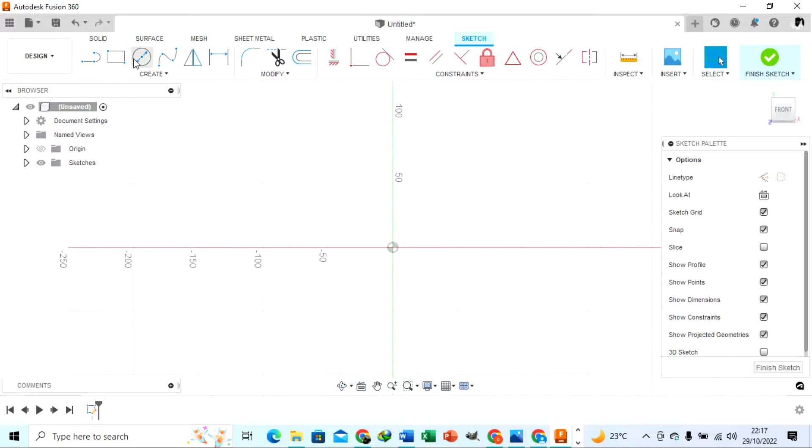On Fusion, just select any plane, then go to circle command, draw a circle. The diameter there is 260. Once you do that, now you can go to line command and draw the two construction lines, so that you can select these two lines and press X on your keyboard to convert them to construction lines.

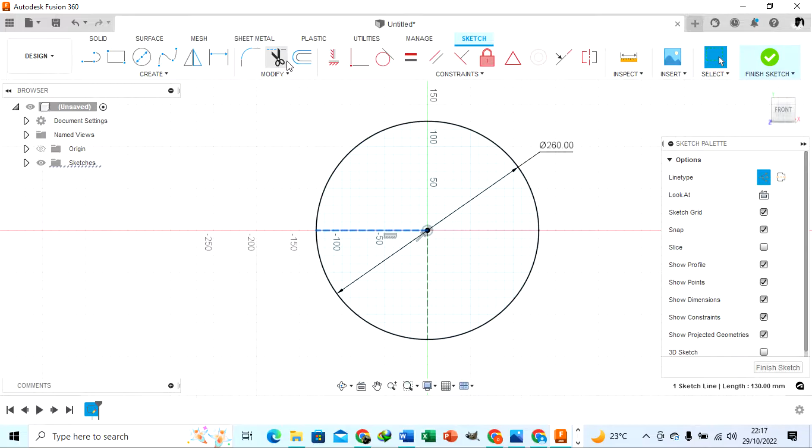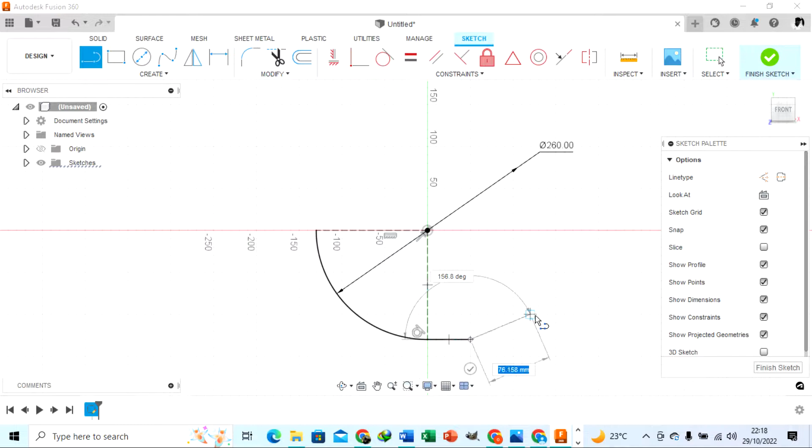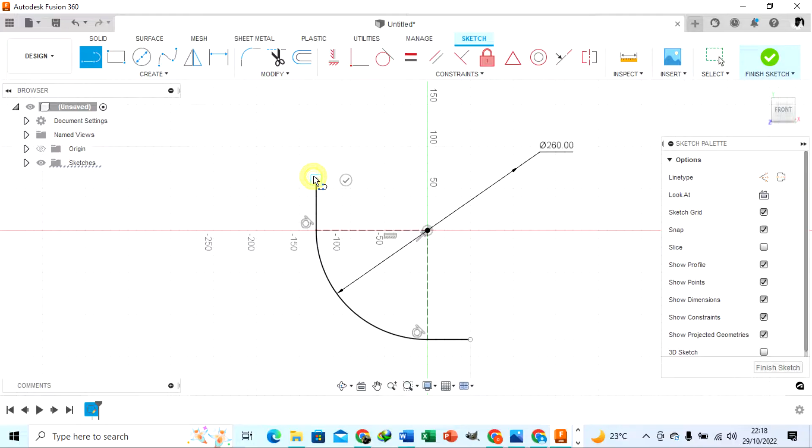Sorry, I trimmed the wrong one. Just Control Z. Once you trim the unwanted parts of that figure there, you can go ahead and now add the lines. From the figure, there were some straight lines measuring 150 millimeters. By default, it is tangential to the curve there.

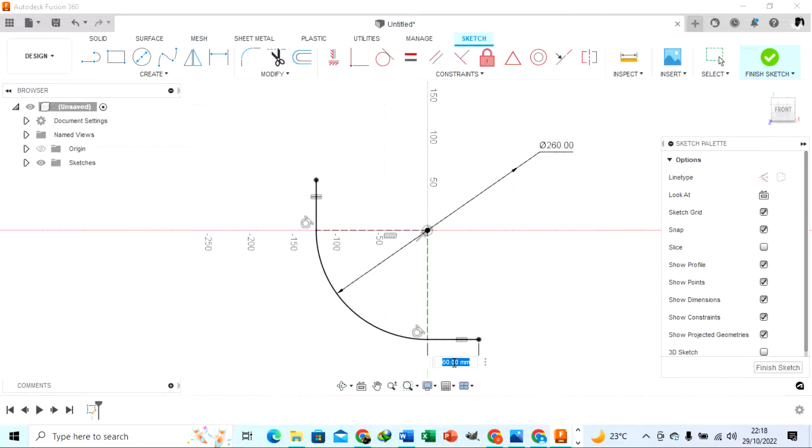So select both lines and ensure that they are equal. Select them by holding the Control key on your keyboard and add a constraint of equal there. Add the measurement as 150. So this one looks good. And now from there, the outer diameter is 290 while the inner diameter is 210. So the difference between the two there is 80, and meaning thickness will be 40.

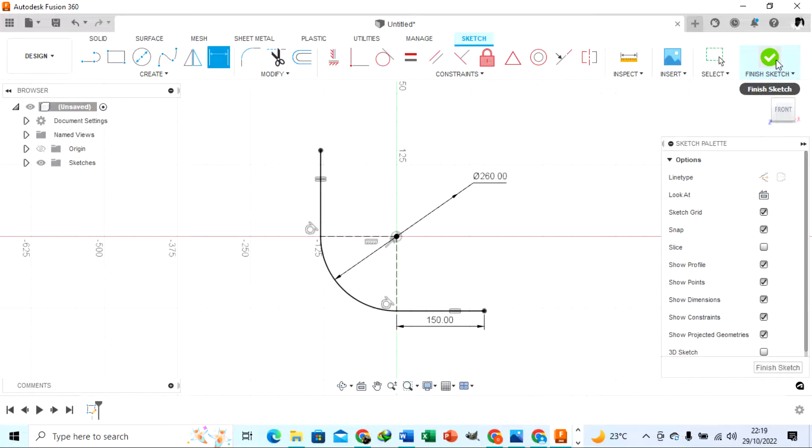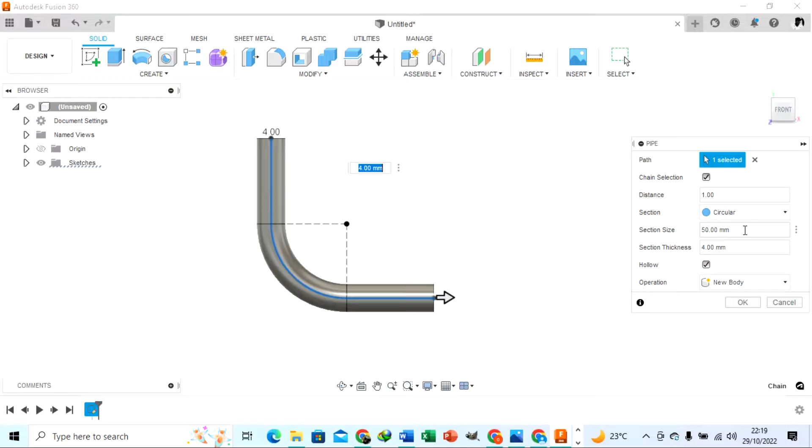Go to pipe command under create. So pipe command, ensure the hollow is checked on that floating window. Ensure you check the hollow box there. So the outer diameter is 290 millimeters. Then this one doesn't look right. What's not happening? Let me just confirm something here.

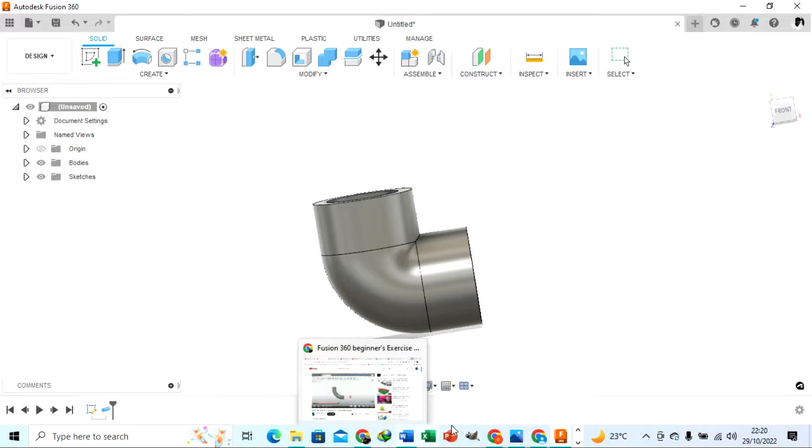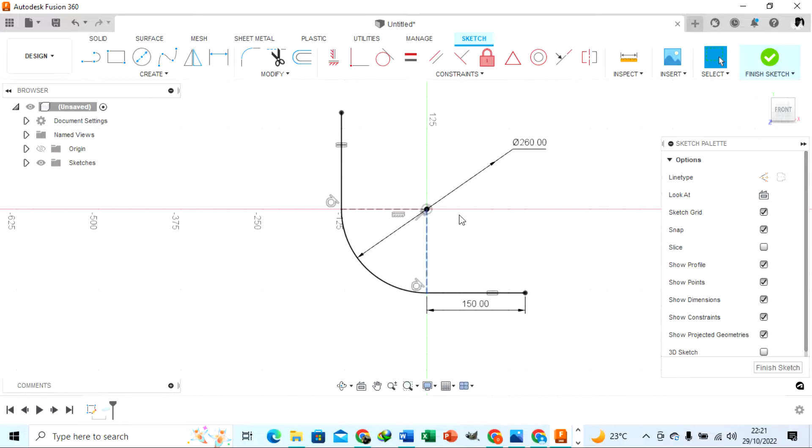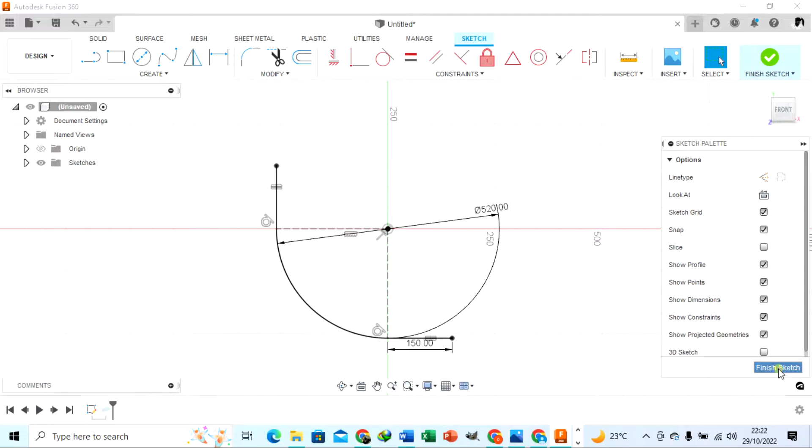Oh, sorry. It seems I used a diameter of 260 instead of a radius of 260. So go to design tree under sketch, and you can change that. So instead of using a radius of 260, I used a diameter of 260. You can just change this by doing 260 times 2 on that box there. 260 times 2. And now this one looks okay. Yeah, so this is the goodness of Fusion. You can always go back to the design tree and make the changes.

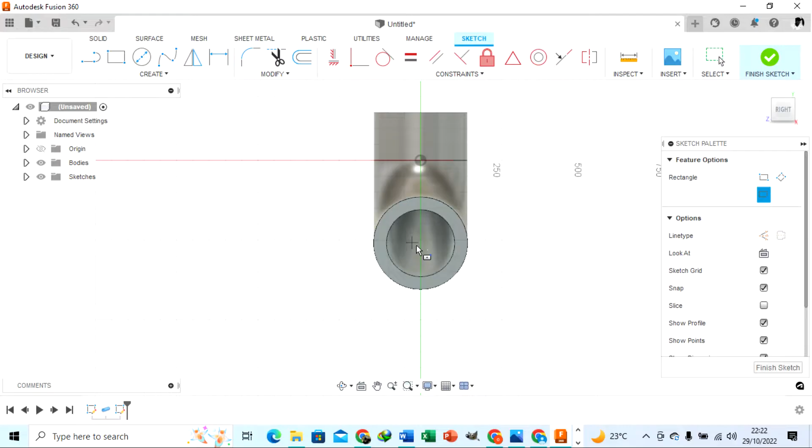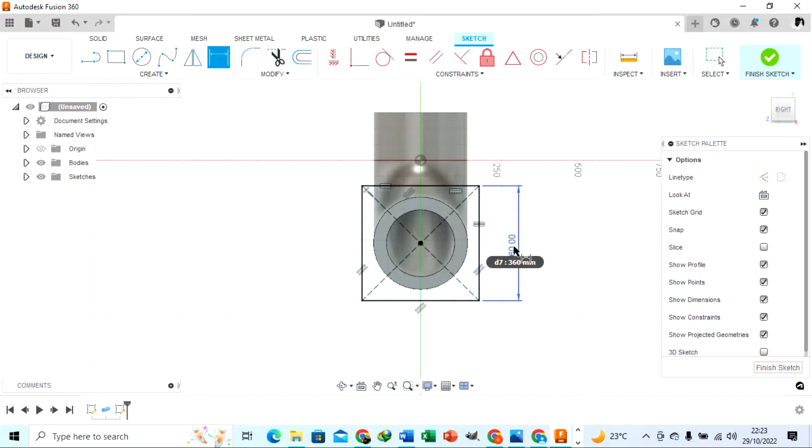So there's this plate measuring 360 by 360. So just select that front face there and go to sketch, and we take a center rectangle. Since it is a square, we can go ahead and ensure that both sides are equal. Add equal constraint there, and now we can add the measurement on only one side. Then we can finish sketch.

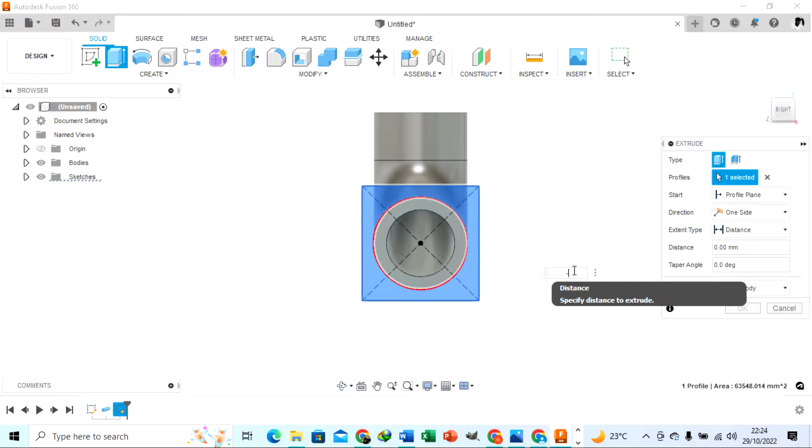Then you extrude. You can always use the shortcut key on the keyboard. For extrusion, you just click E. Now since it is going to the other side, we can feed in negative 50, so that we extrude towards the opposite direction. Okay. Now we can add the holes.

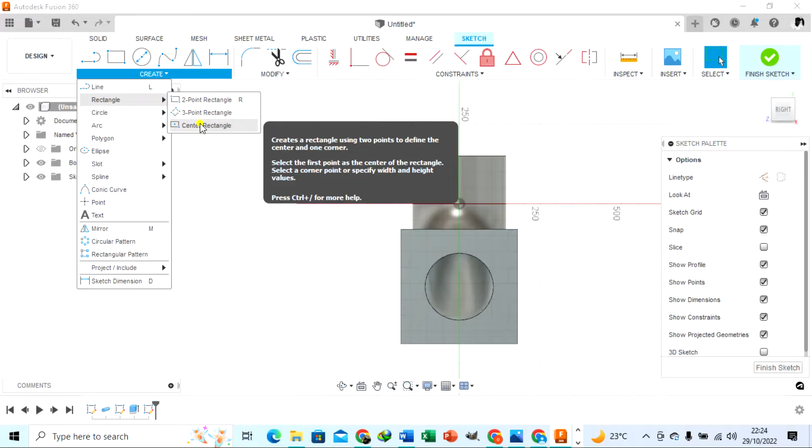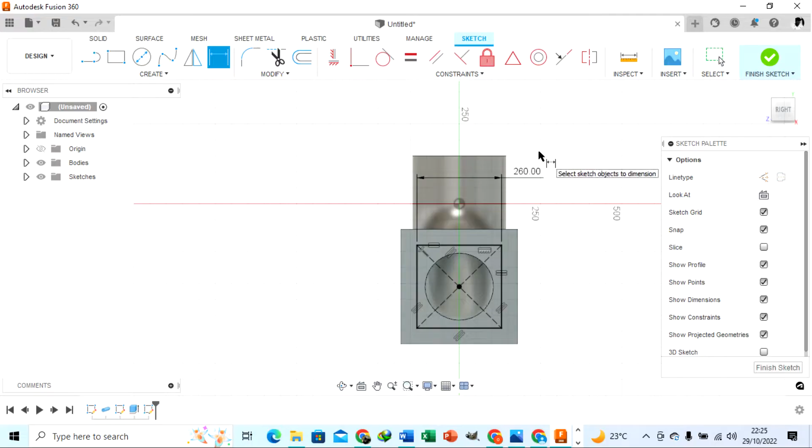So for the holes also we can add a center rectangle, and we ensure the sides are square. So you add the center rectangle, and this rectangle is not part of the sketch. It is just for construction purposes. It is measuring 260 by 260. Then now you can go ahead and select. You can always power select, but let me just select the lines there manually, to make them construction lines by pressing X on your keyboard.

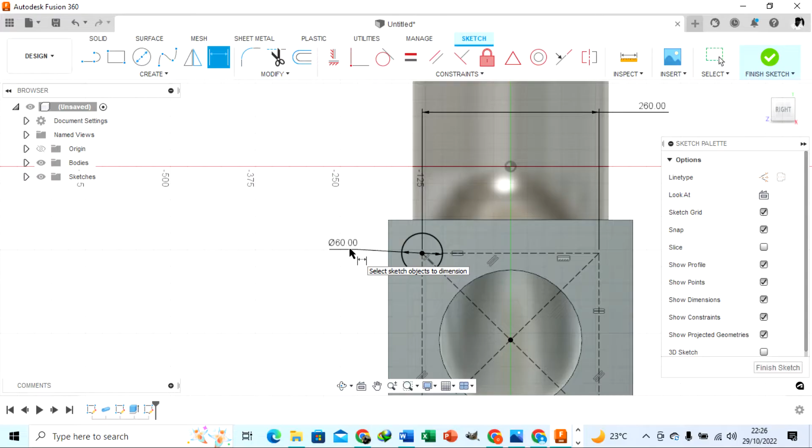Now we can go ahead and add the circle on one of the corners of this rectangle. The outer circle was measuring 60 millimeters, while the inner circle was measuring 30 millimeters. You can always also offset the bigger circle. The difference is 30.

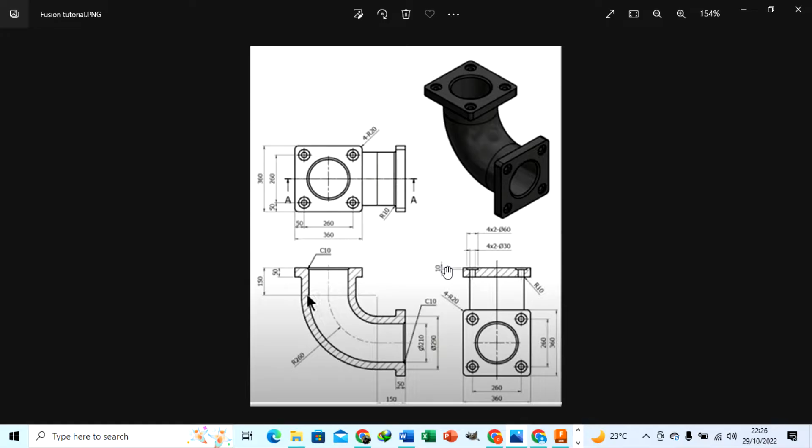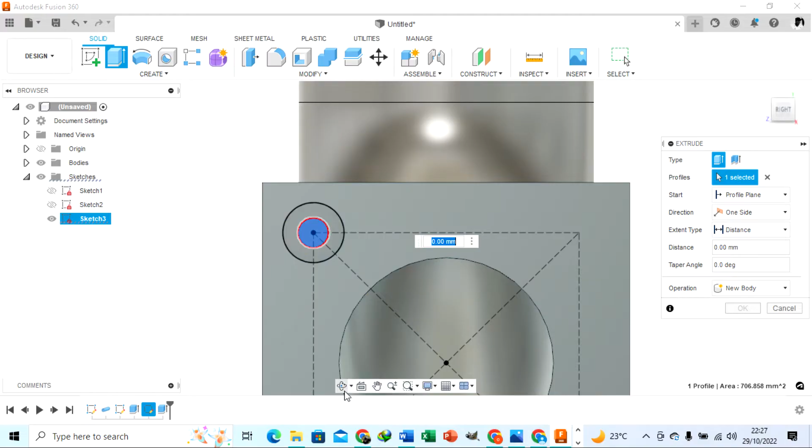Once you do that, you can now extrude cut. The bigger circle is going to be 10, while the smaller one is cutting all through. So we start with the bigger circle. So you select both, and negative 10 because it is cutting through. Then we also show the sketch. Then now we extrude the smaller circle all the way through to the other surface. We can now go ahead and hide this sketch from that surface.

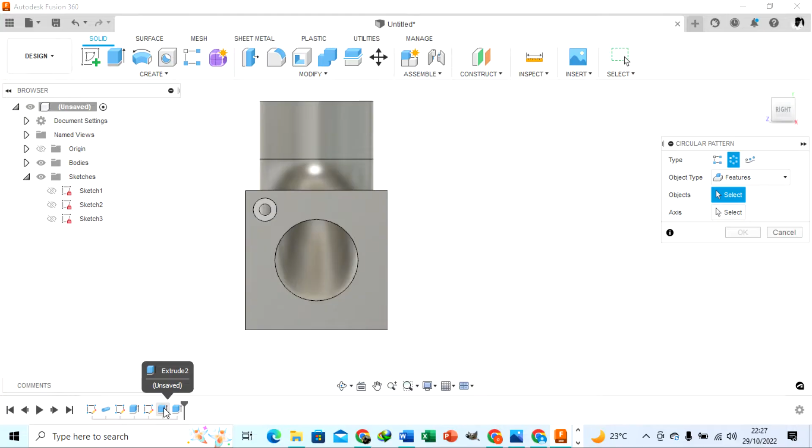And now we can pattern these holes to the other remaining 3 corners. So select circular pattern, and now we want to pattern the features. These 2 features, the last 2 features we used, are equally spaced, and we can select that axis of the circle and ensure the number of holes is 4. Then press OK. Once you do that, that is complete.

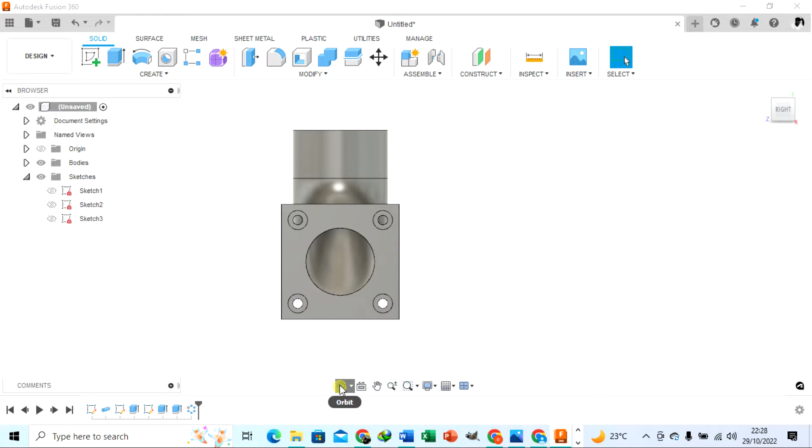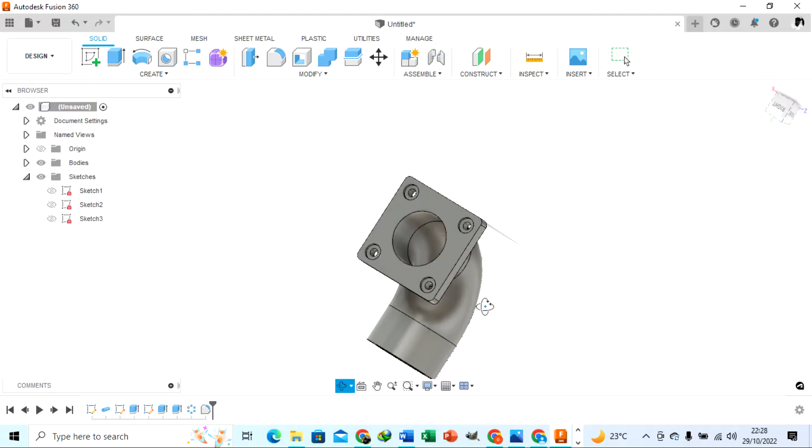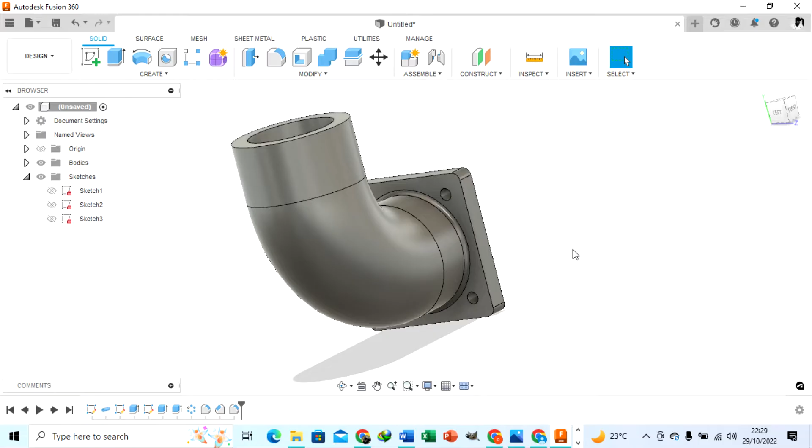So on the other end, there is something I forgot to add. You can add the chamfer on the inside bit, and also add the fillet on the outside. They are both measuring 10 millimeters in radius. So this looks okay. So replicate whatever we did on the other part on this side.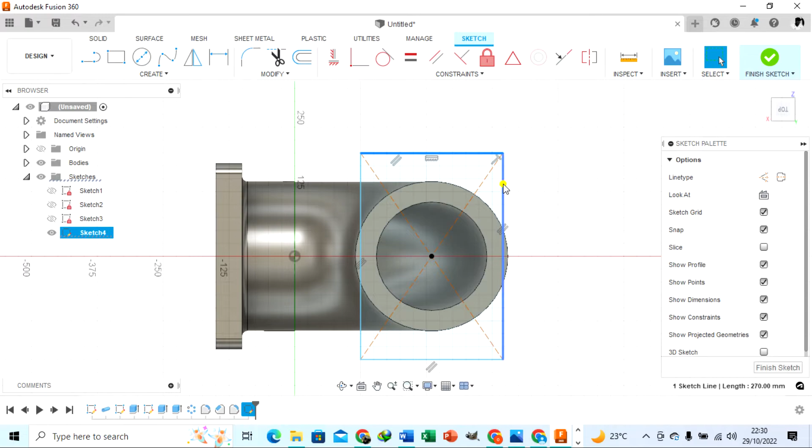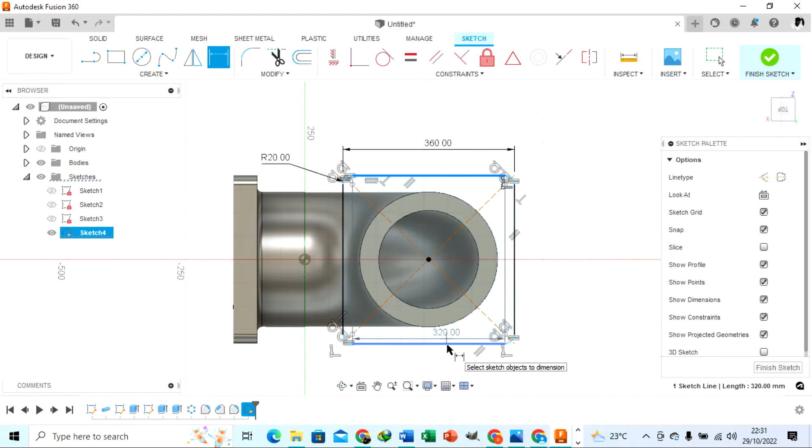So on this one I'm going to be a bit fast, so that we can save some time. Also I'm going to employ a different technique. Instead of using fillet, I can just use this line fillet, but also be careful that you might lose some of the constraints, and you will now be forced to add them manually. Once you add them, you can confirm whether it is exactly the same measurement as you have put it before. So extrude there 50. So this looks okay.

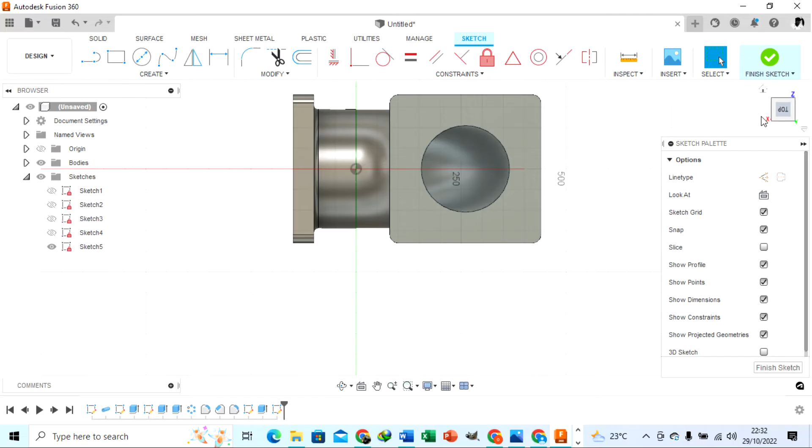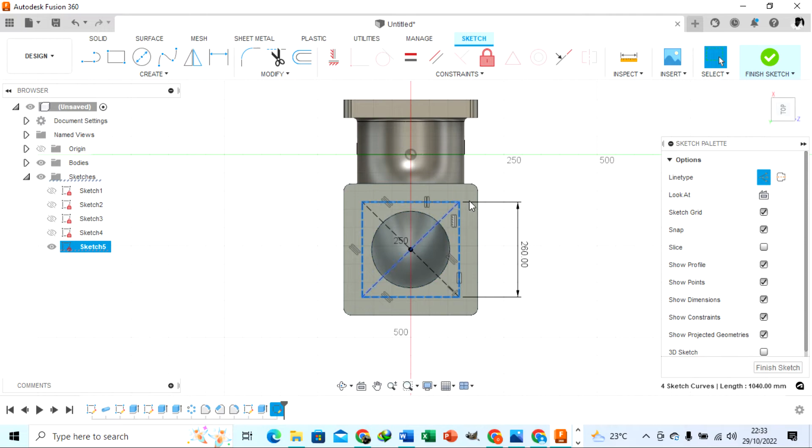There's also another way of adding a chamfer. Select the surface and add a rectangle for the circles, center rectangle. It is measuring 260 by 260. Ensure those 2 sides are equal. Add measurement, and now you can make it a construction profile there. Add the measurement of the circle 60. The smaller one is 30. As I mentioned earlier, you can always offset the bigger circle to make the smaller circle there.

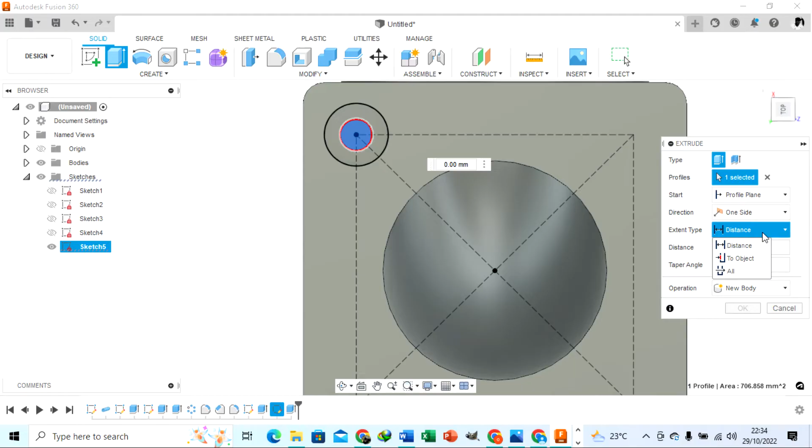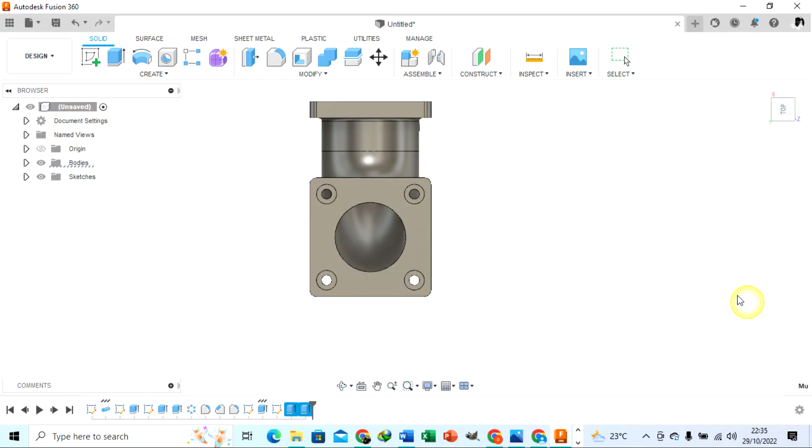Once you extrude there, you can hide the sketch, and now you can also pattern the hole to 4, and they should be equally spaced. Now you go ahead and add the chamfer of radius of 10. Then on the outside you add the fillet of also radius of 10 millimeters. Then now you're good to go.

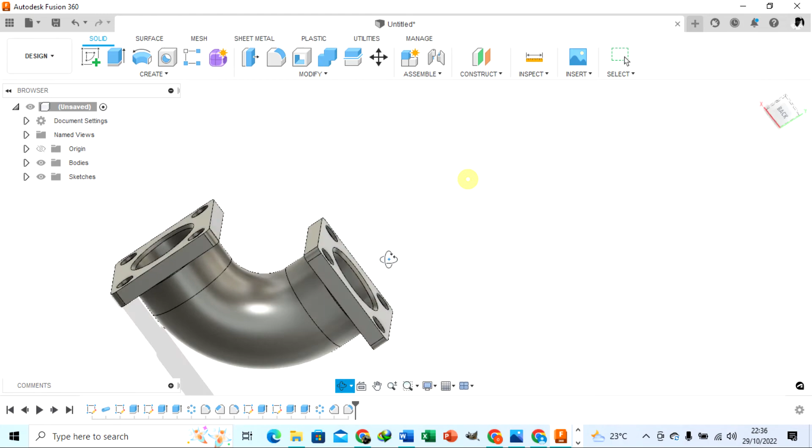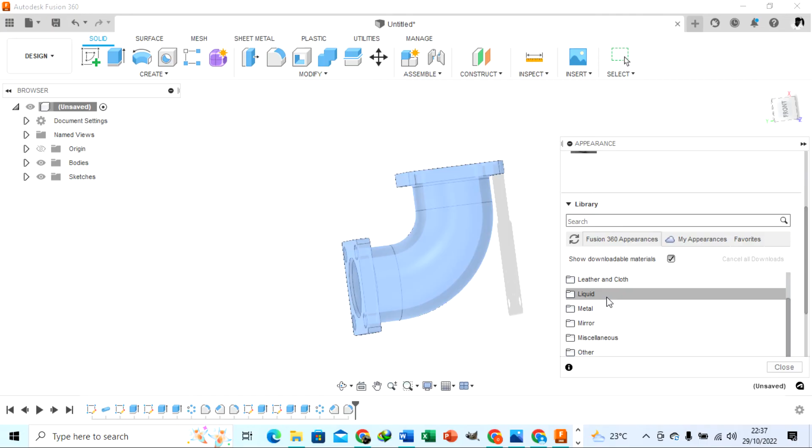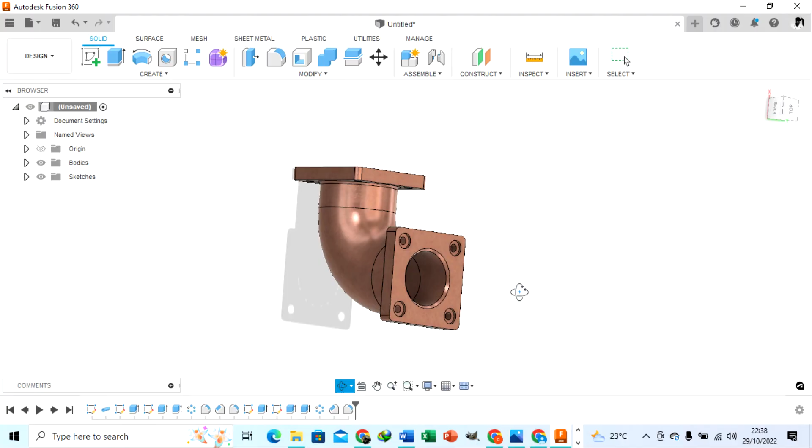So the only thing remaining is to add the appearance, that copper shiny appearance. I haven't saved it there, but just right click on the name of that figure, then select appearance. You can also just press A on your keyboard for appearance and go to metal, then you go to copper. So once you see the one which is good for you, just press and hold and place it on the figure there. So this one looks good. This is how you can do this in Fusion.